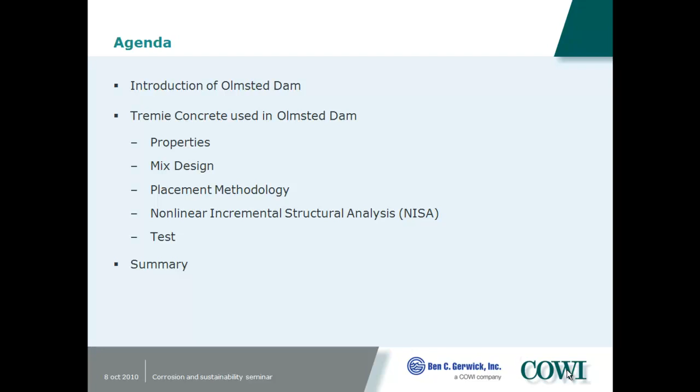So first I'll give an introduction to Olmsted Dam so that you have an idea what we're talking about, then we'll go into the concrete properties. I know that not every bit of technology is appropriate to everybody's concern, but at least you know that there's a whole suite of technology here that's applicable.

It's on the Ohio River, about 17 miles upstream from the confluence of the Mississippi. It goes from Kentucky to Illinois, and it's about a half-mile long. It's a navigation dam, not a water supply dam. It's got Tainter gates, about 600 foot of them to regulate the river, and a navigable pass to allow navigation to go by during high water. During low water, they put up the navigable pass, and traffic goes through the twin locks, 1,200 foot long locks that have already been built.

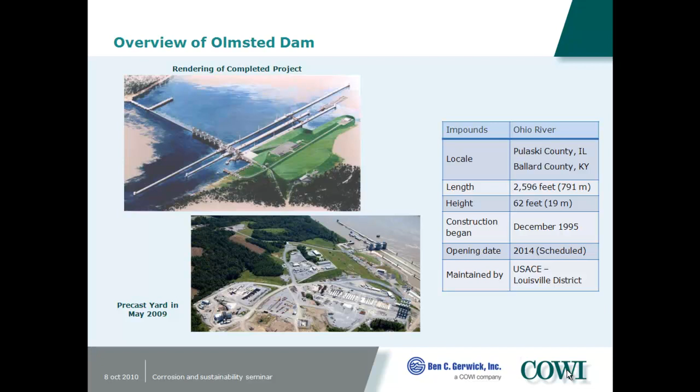Building it using precast concrete elements built on the river bank kept it out of the flood stage and allowed them to stretch out their spending dollars to match the funds that were available. So we built the precast yard here on the riverbank. All this was done for the Louisville district of the Army Corps.

And the contractor elected to use a gantry crane, about close to a 6,000 ton gantry crane superlift. It is possible to configure it differently to skid onto the marine skidway, but this felt it was optimal to do it that way. These precast dam shell segments weigh close up to over 5,000 tons.

We have a cradle for a marine skidway. A lot of it goes underwater so that you can launch out the shells at different water stages depending on wherever the river's at. And this super gantry is tall enough to lift up some of the shells and go over the top of others if need be.

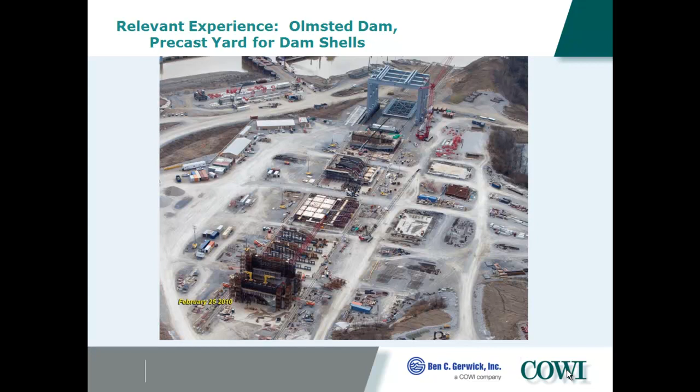And there's a lifting frame to provide structural support to the shells as they're lifted, so it's like a strong back, but also it acts as a Tremie placement platform. So all of the Tremie goes down through these legs and through holes through the shell. You can see some reinforcing in it.

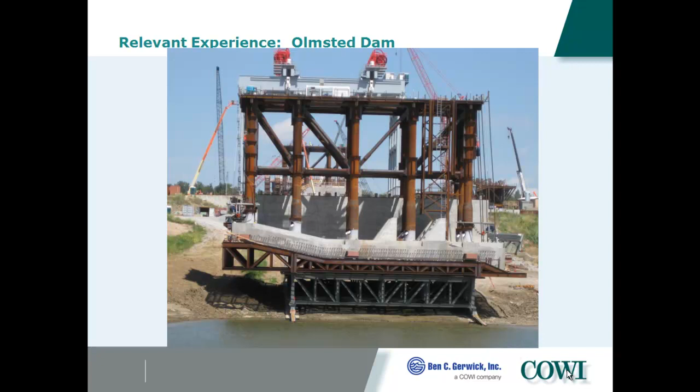The Tremie ties in the shell to the pre-driven vertical 2-foot diameter steel piles driven into the bottom of the river. There's an 8.3 Richter scale earthquake requirement here, so a large requirement.

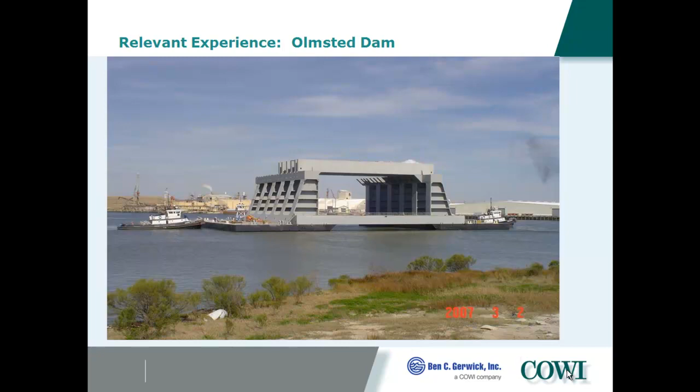After the shell goes down the marine skidway, it gets picked up by this over 5,000 ton capacity gantry crane barge that uses strand jacks to lift up the lifting frame and transport the shells partially submerged to the site where it's set down over the piles.

So the piles would be here, they're not shown. There's also a grout mat to provide a good clean interface. It could be cleaned off, and once it's cleaned off, there's some water that's circulated in here to put any suspended material into suspension. Then we start at the lower point, placing Tremie concrete through the legs, and then move up so that we always place concrete into the previously placed concrete until we fill up the shell.

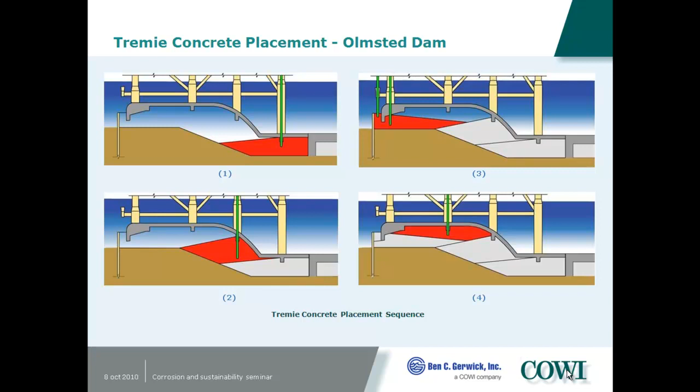They've already placed the stilling basin shell, and I believe they're starting on the ogee or sill shell this week. This is another project that was comparable.

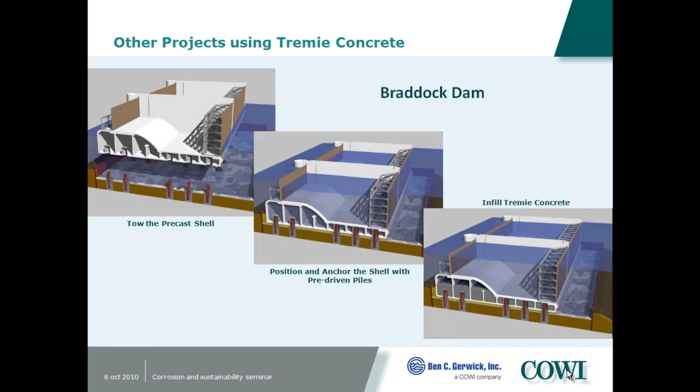Instead of using a lift-in approach, Braddock Dam on the Monongahela River, for the Pittsburgh District, was a float-in type shell where they used maintenance bulkheads to provide buoyancy, then floated over drilled shafts with a pintle type connection. They used Tremie concrete in there just to get a seal, then went in the dry and placed the rest of the concrete in the dry.

Here's another example that uses a fair amount of anti-washout admixture. We consulted on four jobs like this in Florida, where ships would hit a reef, and the reef is only alive on the surface, so it's dead on the surface after it's been collided with. They wanted to come up with this dental concrete to repair the cavity so the reef could go on growing and not die away.

So we made precast concrete elements and used some rock boulders, then used anti-washout admixture with the Tremie concrete to have essentially almost a zero slump. No, not a zero slump - it was almost a 12-inch slump concrete. It was self-consolidating concrete.

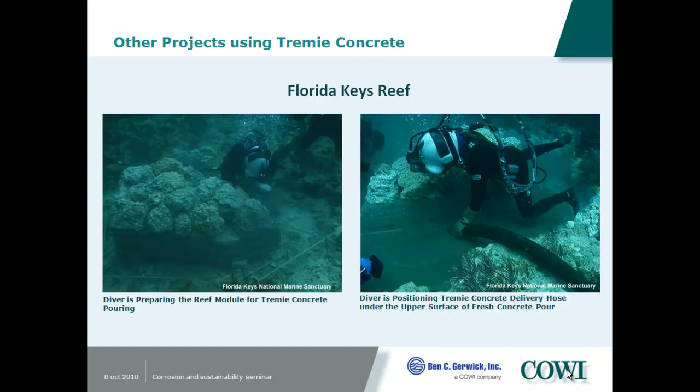There was no negative impact on the surrounding fish or the lobsters down in there. The anti-washout admixture stops the cement particles from going off into the water, making it alkaline.

For those who don't know, Tremie concrete is placed through Tremie pipes to separate the fresh concrete from the water, and then you form a seal, so you're always placing concrete into previously placed concrete, so it's not mixing with the water. Some advantages are you don't have to have a cofferdam, but you often use Tremie concrete to seal a cofferdam as well.

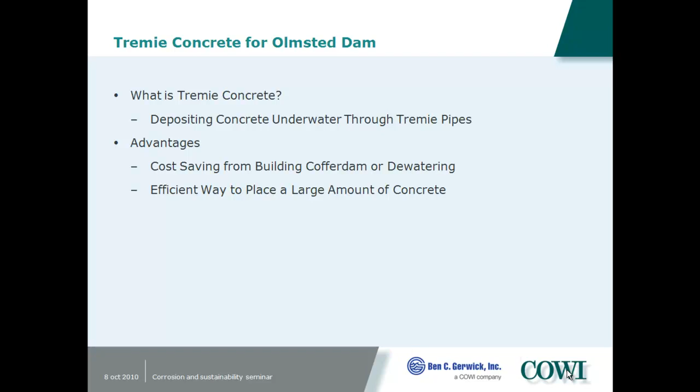But in this case for Olmsted, we don't even have a cofferdam. And it's an efficient way to place large volumes of concrete.

Disadvantages: you have low accessibility to check the placement, so you need to do a lot of quality control in advance. There are sonic methods for checking, and coring, and other methods.

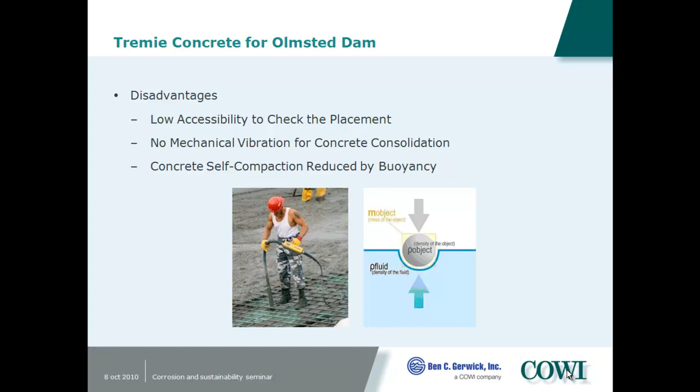You don't normally consolidate the concrete. We've done studies on ways to consolidate it underwater, but if you start agitating, it can promote mixing with the water. You want to have something that's self-compacting, but with buoyancy, it doesn't flow out the same way because it's supported by the water.

So of course there's risks of honeycombs. There's concerns about laitance - that's when a little bit of the fresh concrete mixes with the water, and there's a little bit of surface weakness to the concrete, so the concrete is better down below the surface. There's concern about washout, and particularly heat generation, so we use a large quantity of blast furnace slag for a large concrete placement.

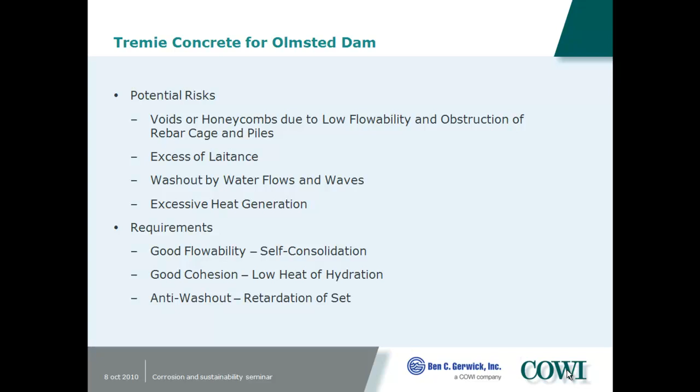So we had good flowability, self-consolidating, low heat, and self-retarding. We used an anti-washout admixture, which is something you could think of like salad dressing - it's an admixture that makes it thicker, so instead of running like water, it's more like salad dressing.

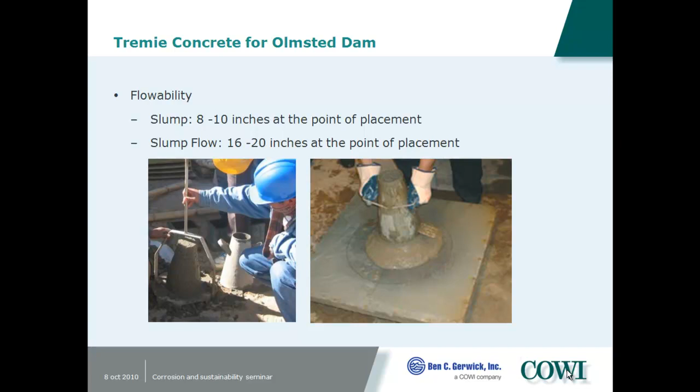We had a 10-inch slump on the concrete for Olmsted Dam, rather than what we used in Florida. We also have a slump flow table test where you measure the diameter as it flows out, which is another measure of its consistency.

As you see, it builds up around the bottom of the Tremie pipe, building up a bit of driving head to push it out. It moves out like a series of landslides - it builds up enough head, overcomes the shear strength of the fresh concrete, and slides out, building up another pile as the concrete comes out, sliding out and moving laterally. So it's always moving concrete through the previously placed fresh concrete, and you always keep lifting up the pipe as you get to the top, so you're not placing through concrete that might be setting towards the bottom.

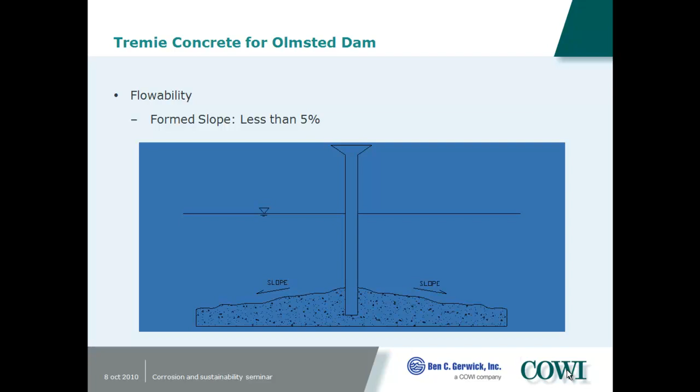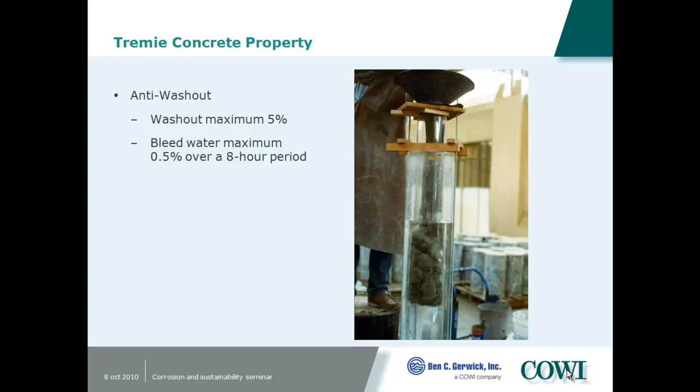Also, when you put in the anti-washout admixture, it also decreases bleeding, so there's better adhesion with the reinforcing steel bars. There's less top bar effect because of that.

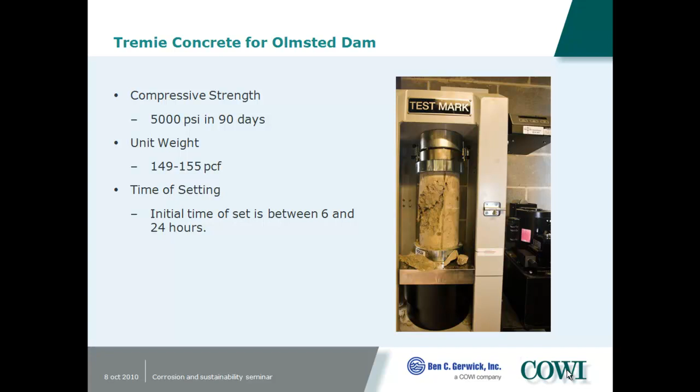We, of course, monitored the compressive strengths. These were just the design properties. On this particular job, we had an initial set time between 6 to 24 hours. We wanted to keep it workable while it's being placed underwater.

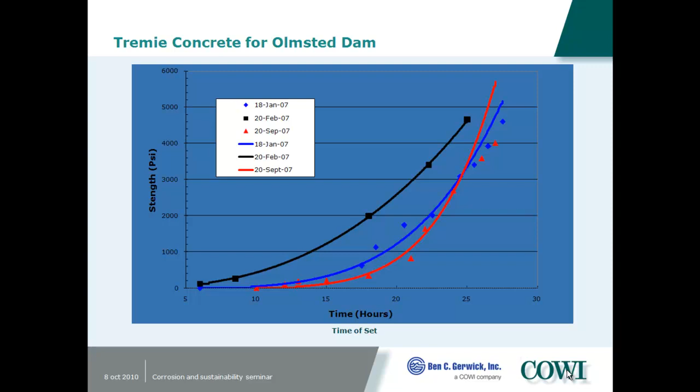So here was the strength gain with time. We had it heavily retarded here with a lot of admixtures, so it took a while for it to reach set. Then you can see within a few hours afterwards that we were exceeding our design strength, because you have to put an extra amount of cementitious material into the Tremie concrete to get the workability. So the strength is almost a byproduct. Reaching the design strength, as you see, was achieved within 1 day.

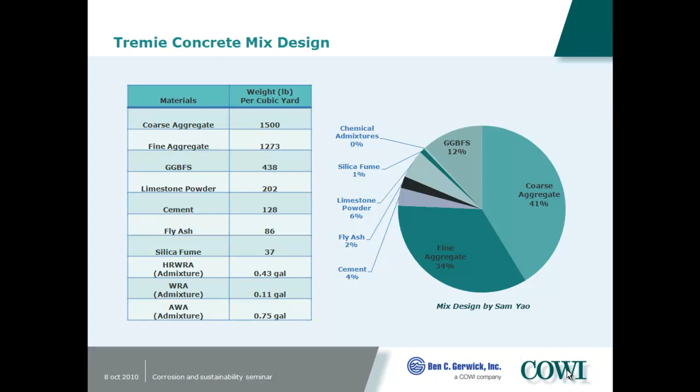And it also reduces the heat. We had fly ash as well and silica fume. Here's the high range water reducer, the low range water reducer to extend the workability life. And here's the anti-washout admixture.

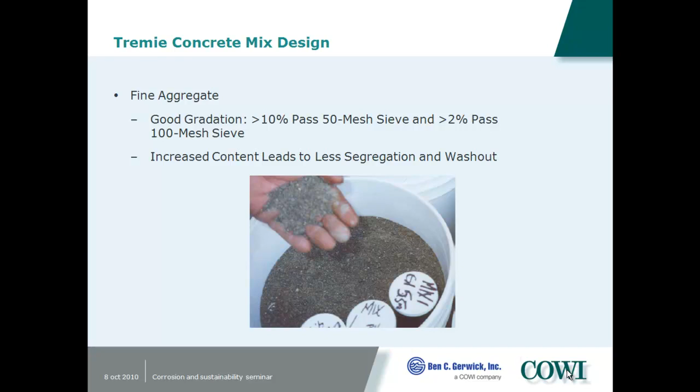So this is a photograph of the fine aggregate, the standard coarse. Just gives you an idea of the type of meshing we had.

It's important when you do a mix design, you have to always observe the fundamentals. You shouldn't just use anti-washout admixture to solve your problems, or use a high-range water reducer to try to ensure workability. You have to have a good gradation of your aggregate to try to keep your cement content under control.

This does show that of the cementitious material, half of it was granulated blast furnace slag, only 14% was cement, 10% fly ash, 23% limestone powder, and 4% silica fume. So we only had 14% of a material that was causing a carbon footprint. All the rest of this is essentially a byproduct.

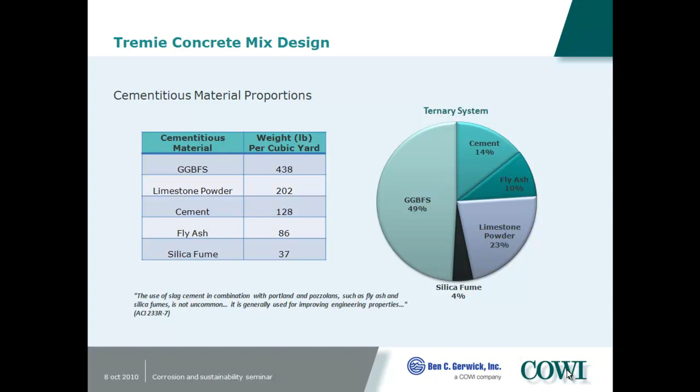But although it is a green mix, the main purpose of this was to control heat of hydration for a massive pour.

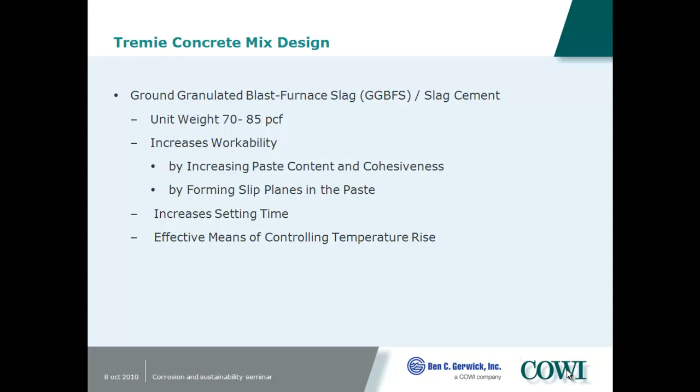So here's the granulated blast furnace slag. It gives you the unit weight. It's actually lighter than cement, so it can have an advantage that way. Whereas weight's important, if nothing else, this was a seismic zone. By having a lower density, you had a little bit less seismic demand.

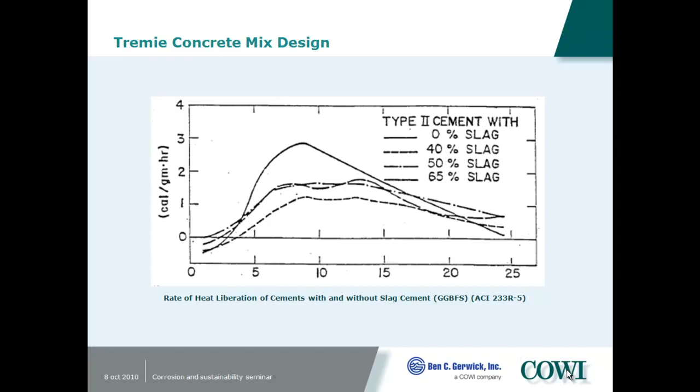This does show the rate of heat of hydration for a typical slag. So without any slag, you'd have a lot of heat, more heat, and it would come earlier. With a 65% blast furnace slag, there would be less production of calories.

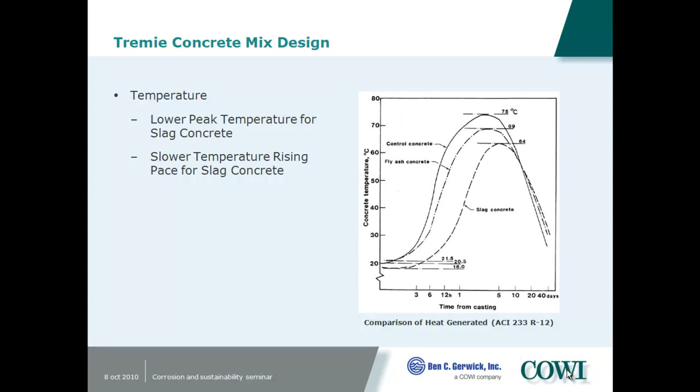Here's the representative heat generation with all cement. You have a higher heat of hydration. With a slag type of concrete, you have less heat of hydration. So you can put in more slag than you can fly ash, so you can get a lower thermal footprint here. We also used type 2 cement. It had better resistance to sulfate and hydration.

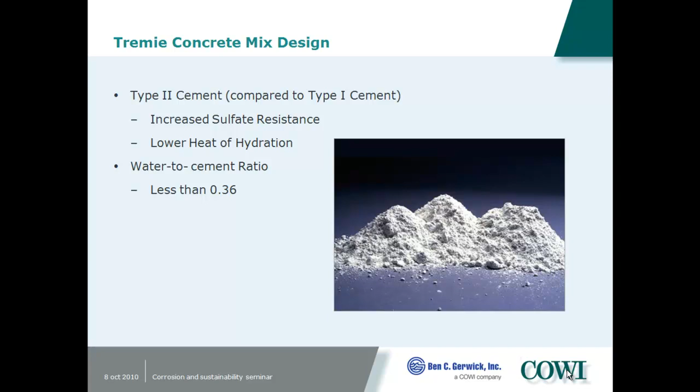On our mix design, I believe we had a 0.36 water cement ratio.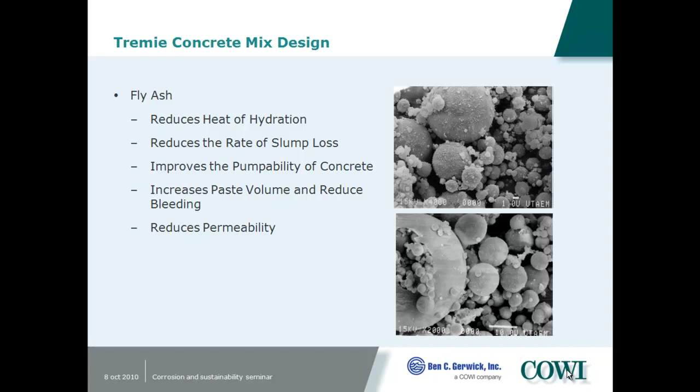So this just gives you some of the background on fly ash. It comes from burning coal, and then they collect the fly ash going up the flue, and then they have to process it a little bit. But it also reduces the heat of hydration. It can reduce the rate of slump loss, so you can have a longer workability life. It can improve the pumpability, decrease the permeability by increasing the paste volume and reduce bleeding. I guess this is a result of some of this hydration going on.

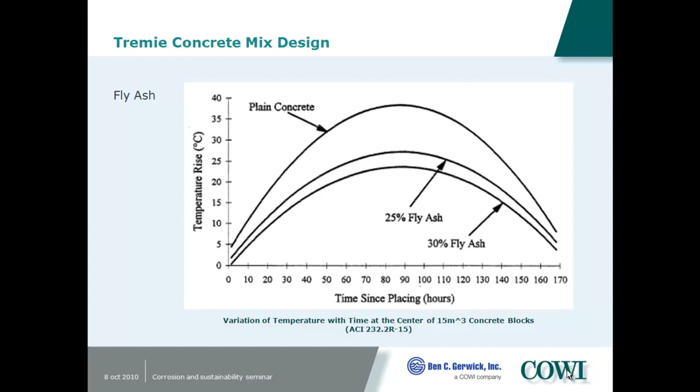So this just gives you the time since placement with the heat rise by using up to 30% fly ash, which is about close to the limit. You can go higher than that, but you get reduced strength gain, as we showed here.